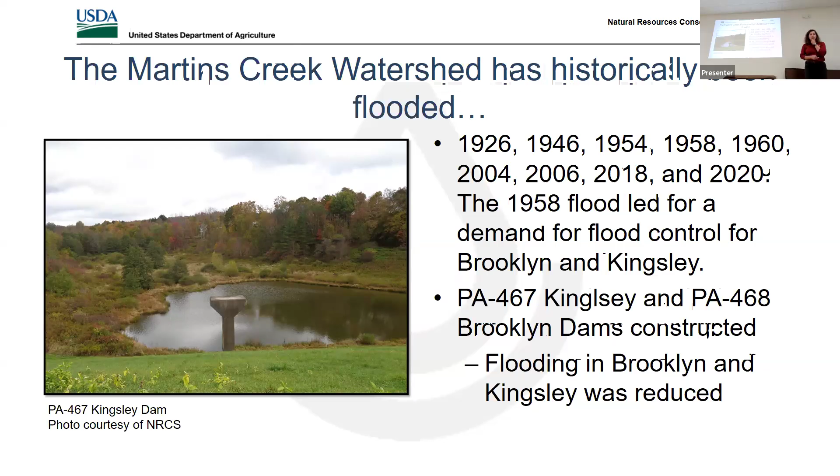You can see some of those major storm events. So the dams were constructed and are doing their jobs well for those communities, and the flooding in those communities was reduced. However, it didn't quite go far enough and nothing ever made it down river. Those dams are too high up in the watershed to significantly control flooding down here in the Nicholson area.

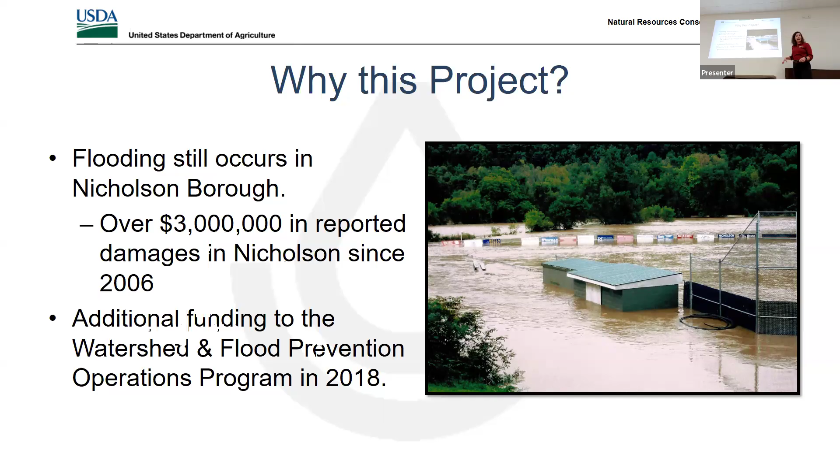So at that point, the Wyoming County Conservation District and the Nicholson Borough reached back out to NRCS and said, hey, you guys did good work up there, but what about us down here? Can you do anything and help us with our flooding now in this area?

So we embarked on the watershed planning process. Planning is the first phase of a three-part process to actually build something. Because these types of projects are expensive, multi-million-dollar projects using taxpayer dollars, they need to be very deliberately planned to make sure they're a good use of those funds. I know you can joke about federal government and taxpayer dollars, but we do our best to make sure we're using them efficiently. It's a three-part process, and the planning phase we're in now can take generally 2 to 3 years.

The design phase, which includes permitting, and then construction.

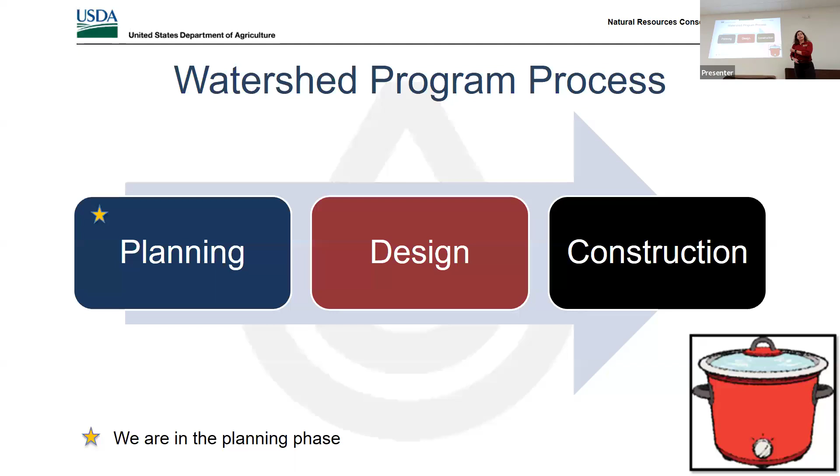If you were here last time, you'll remember my crock pot. This is an extended process, but I always joke—I don't joke, I'm very serious—that better things come out of a crock pot than they do a microwave.

So relating to that plan, we're quickly going to talk with you tonight about what we've done: problems and opportunities, determine the objectives, inventory the resources, analyze the data, develop alternatives, evaluate those alternatives, and then you are part of the step we're at here, making the decision before we move forward and ask for funding to implement the plan. Any questions on what I've covered so far?

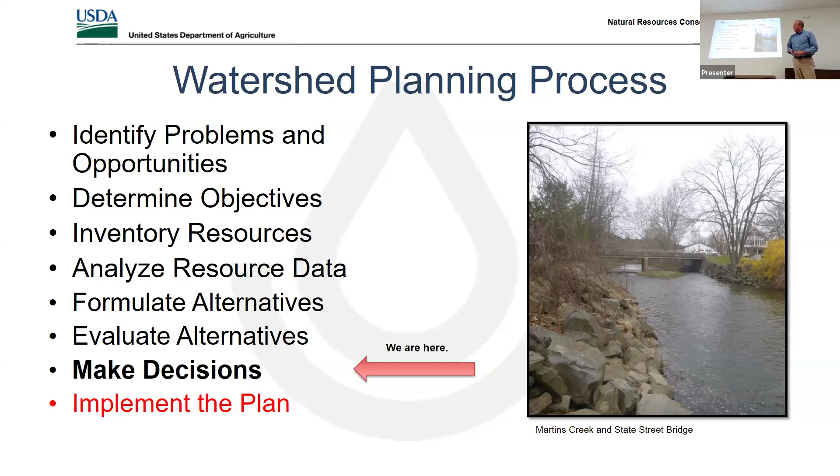We start off this entire process by identifying the problems and trying to come up with opportunities to resolve those problems. There are two main divisions: we have our economic impacts to structures and infrastructure within the town. We're looking for ways to minimize flooding and protect those resources, and make sure we're protecting all of your personal belongings, making life a little easier by not having to deal with these flooding conditions on a continued basis.

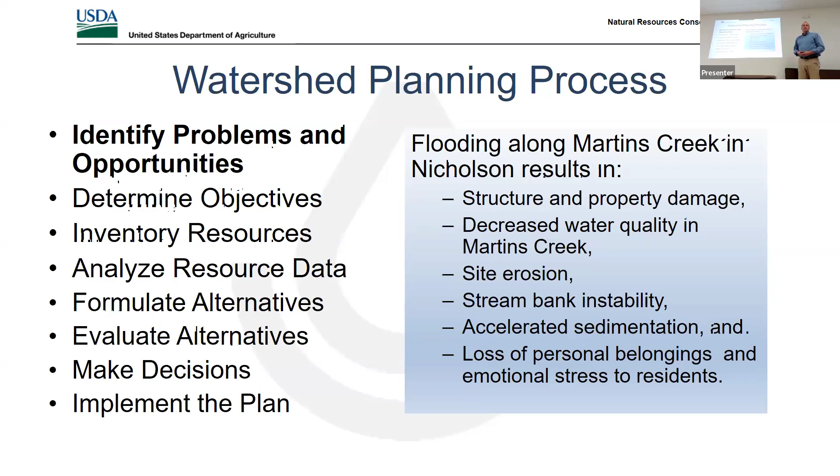So we have the economic side, and then the environmental or ecological side, dealing with impacts from flooding due to stream bank erosion, increased sedimentation within the stream, and decreased water quality in general. Those are the problems, and with every problem there are potential opportunities to make improvements. Of course, the most important thing here is human health and safety.

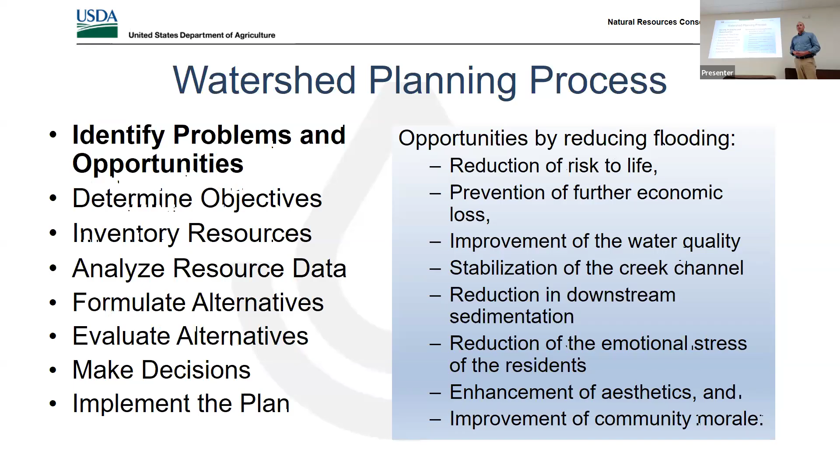So when we talk about flood mitigation, we want to make sure we're reducing the risk to life. We're protecting the resources you have in town, but also looking for opportunities to improve on the conditions that are already here—improving water quality, stabilizing eroding stream banks, and an overall improvement in quality of life.

Part of the process is coming up with a purpose and need for the project, and that's part of determining the objectives. We know there is rather frequent flooding within the town, so we're looking at establishing a threshold to limit flooding as frequent as a 2-inch rainfall event, which is more or less the annual storm event—about the maximum precipitation you'd realize in any one year.

Of course, we understand that we want to maintain access to the stream for fishing and recreational purposes. So we need strategies that meet both objectives: protecting properties, but still maintaining access to the stream.

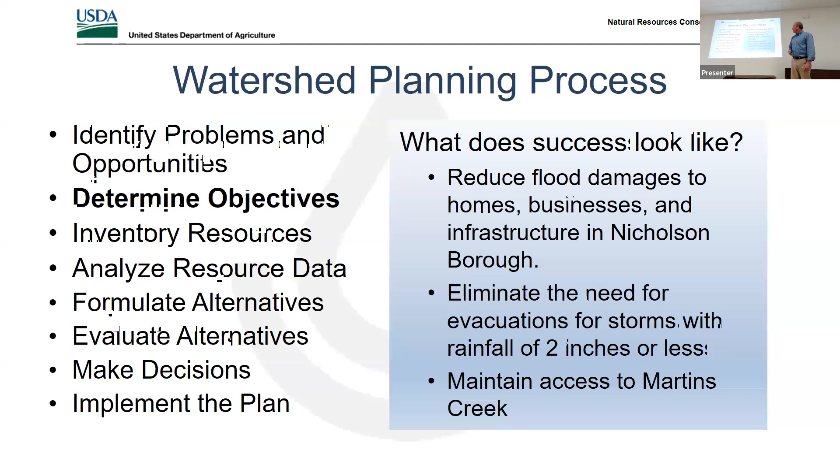The DDK team, along with NRCS, has been busy completing all sorts of work over the last couple of years. There's been a variety of field investigations and work performed at our offices, doing desktop reviews and reviewing available information. Probably the most important is the topographic survey.

Recently we came down and performed a wetland delineation, established ordinary high water, and looked at various databases for historical resources, both archaeological and historic structures. We're looking at potential impacts to climate change and rare, threatened, and endangered species—really taking a comprehensive look at all the resources around town.

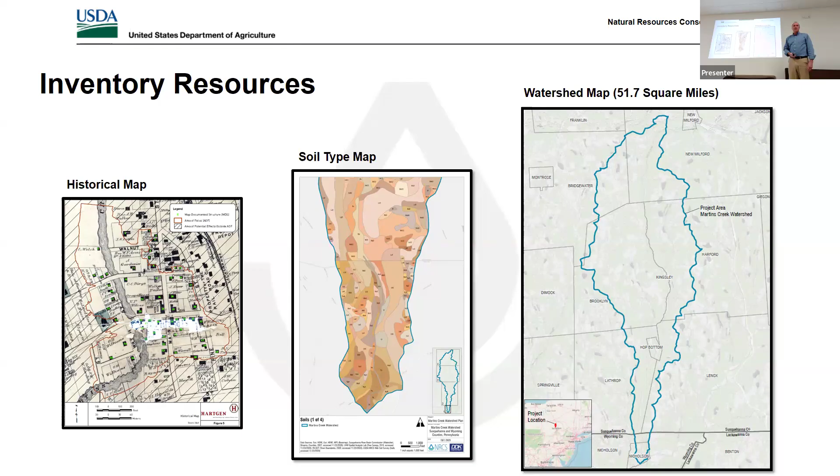This slide gives you a few examples of what we're looking at when performing a desktop review: historical maps on the left, reviewing existing soil mapping, determining hydrologic soil groups—basically the overall characteristics within the watershed.

The H&H analysis—hydrologic and hydraulic analysis—is the meat of the project, and Mike's going to go into a lot more detail on that. This is really where we come to have a greater understanding of what's happening in the watershed. That involves first determining the actual volume of water coming through the watershed, which is done by looking at the topography, the land cover, and the soil types. All of that determines how much water actually arrives.

Once we establish those values, they can be plugged into our computer model, and we can evaluate hydraulic conditions, which tells us more about the extent of the inundation and how fast the water is moving. That all informs us on what appropriate strategies can be taken to mitigate flooding.

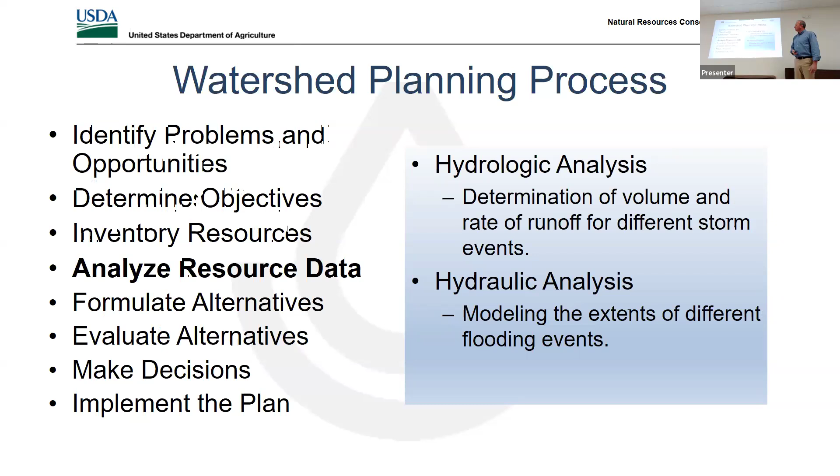So once we understand the issues, once we've studied the watershed, then we can start to formulate ideas. This goes back to the main purpose and need: what do we really want to accomplish here? Well, we want to reduce flood damages. That's really why we're here.

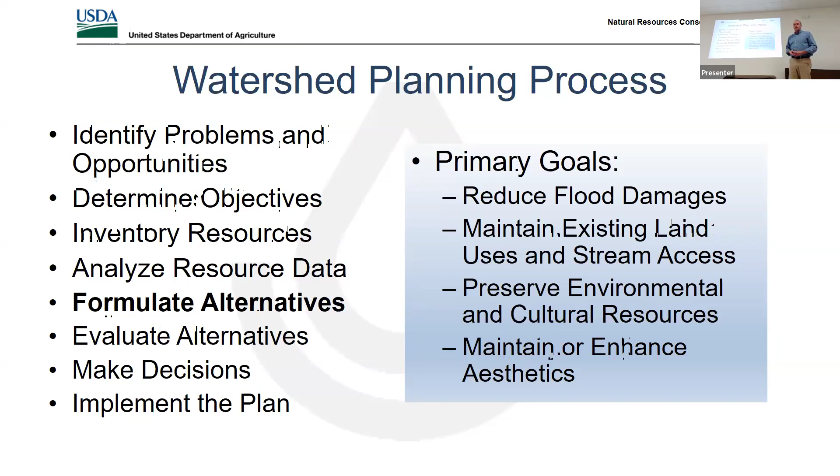Mike will be going into a few more of these flood protection strategies, but there are several. Flood volume and rate reduction is sort of what Heather was talking about at the beginning.

We have existing upstream flood control structures in place that are very effective at reducing the volume of water that arrives in the stream. That's just one strategy.

Avoidance, we're talking about potential relocations of structures or buyouts. With floodproofing options, we're considering either a wet floodproofing or dry floodproofing strategy where we can implement barriers on the existing structure, or improve the openings that exist on structures so floodwaters can easily come in and exit once the flood event is concluded.

We can talk about barriers as a potential strategy. The use of flood walls is one that's being considered here. And finally, drainage improvements, things like improving the stream channel, or a potential diversion structure where you're taking a portion of the flows and redirecting it down the stream.

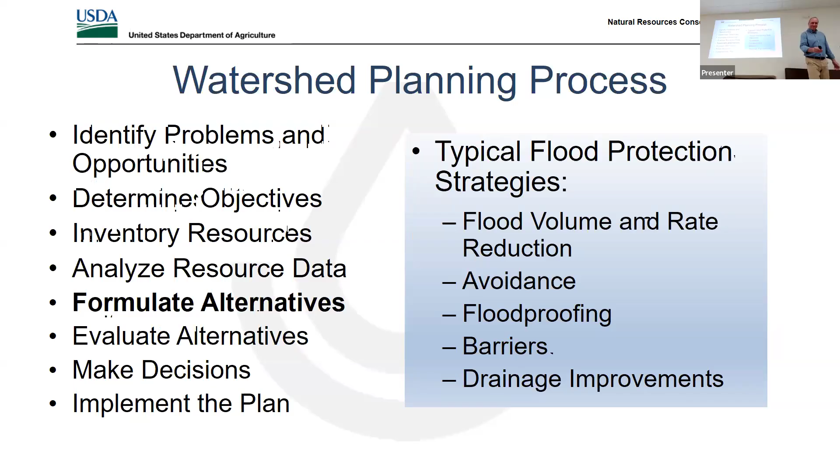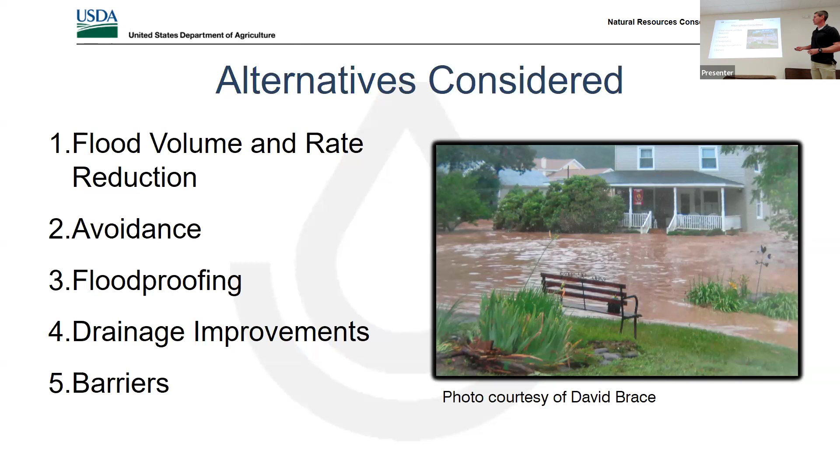Okay, so Andy kind of went over the general idea of these 5 strategies. I'm going to describe maybe some more specifics of how we looked at each of those strategies for this project. We want to talk more about what we think will work and less about what won't, but I'll give you a little rundown of at least what we went through in evaluating these alternatives.

So for the flood volume and rate reduction, as Andy said, we're trying to establish structures upstream to keep the floodwaters from making it to Nicholson in the first place. Some of the more specific things we looked at for this project: what if we can do upstream land use changes or infiltration areas?

And those are nice projects because they're typically green, so to speak. They involve establishing forested areas, landscaping elements and things to help capture the runoff.

For this project, through our evaluations, we found that they're not a great alternative, just given the watershed of Martins Creek and Nicholson is about 52 square miles. And while these types of projects are nice little projects, at the scale of this watershed they aren't real effective. Also, a lot of Martins Creek is pretty rural, as you know, so a lot of it is already forested. There's a lot of green space in the watershed as it is, so there's not a lot of opportunity to make a big change in that regard.

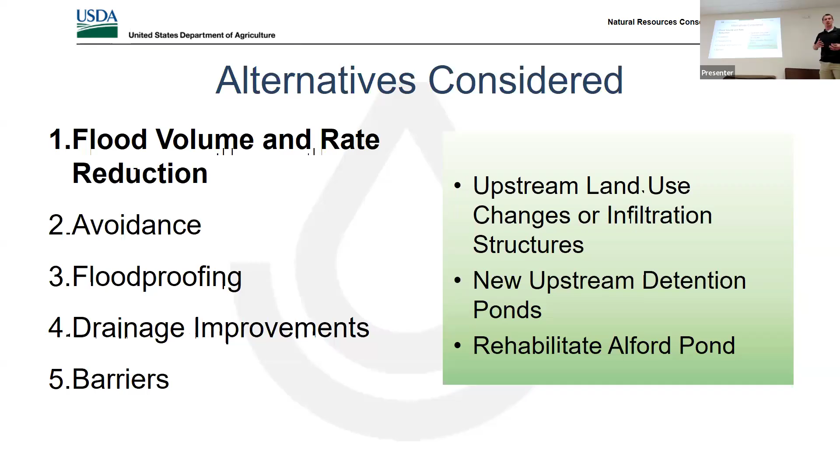The next two bullets look at upstream detention ponds. The other strategy is, can we establish a structure upstream that will capture rainfall and then release it at a controlled rate so it's not coming so fast and so hard at one time in Nicholson here? A specific one we'll mention is the Alford Pond — can we rehabilitate it and better utilize it for storm runoff, as well as improving the stability of that pond.

So on the next slide I can talk a bit more — hopefully you can see this okay. I don't think you need to see the details, but the blue boundary here is the limit of the Martins Creek watershed. We are down here at the bottom in Nicholson.

These teal circles here are existing ponds that we evaluated preliminarily to see: could we just modify an existing pond rather than starting from scratch? Can we just upgrade one that's already there?

So we had a few: Lake Chrisann, Beaver Meadow Pond, Pratt Road Pond, and Jones Lake Pond. We preliminarily screened those. One of the challenges with existing ponds is oftentimes they'll have a community around them, with existing residences and things.

The challenge with modifying an existing pond for it to store more rainfall, which is what we would want, is we would either have to permanently lower the pool, and in that case the residences around there no longer have access to the water—not a great alternative. The other option is raise a dam or construct another structure around it and allow the pool to come up during a storm, but in that event we would flood the residences around it. So there's a lot of challenges with modifying an existing pond.

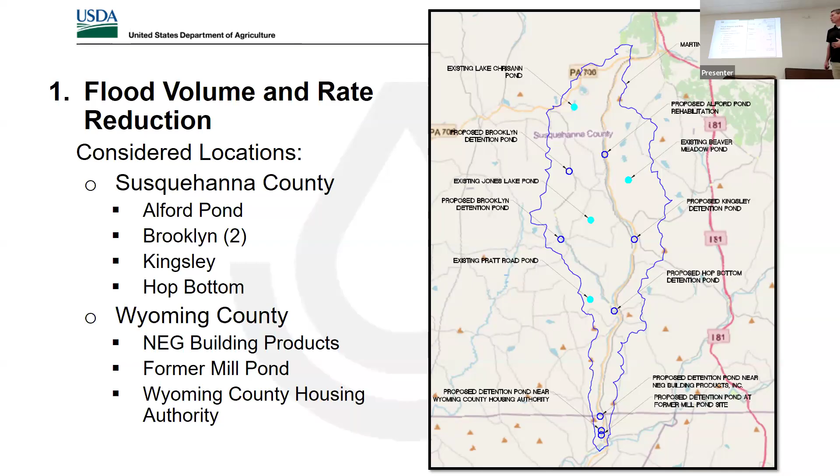With any of these, we dealt with certain site constraints: existing roads, existing residences, utility lines. We need to think about what would be directly impacted by the earthwork to establish a new pond, but also that when it rains, it's going to flood things upstream by temporarily holding that water. So we worked within those site constraints to preliminarily evaluate these ponds.

As Heather touched on earlier, we also have to consider where these are in the watershed. If we're too far upstream, we're not controlling enough watershed to really make a difference. It's a 52 square mile watershed, so we need to control a lot of it to make a difference all the way at the bottom here. And the storage volume is also critical—it's a large volume of water, so we need to store a lot to make a big difference.

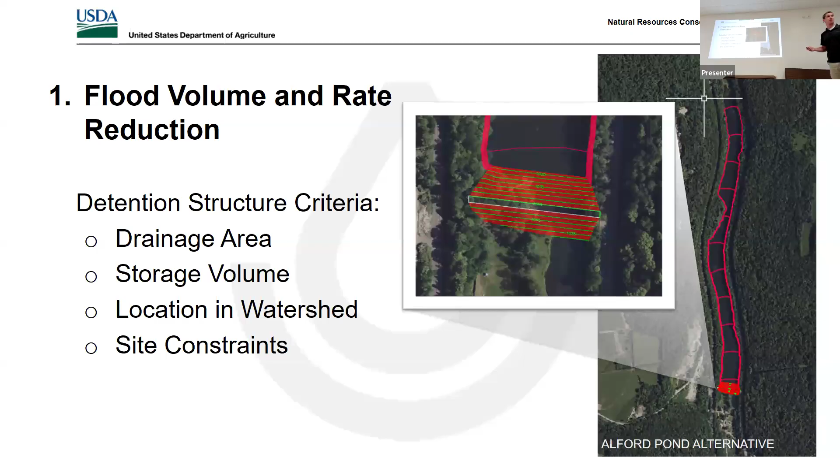The second and third categories are avoidance and floodproofing. From an engineering perspective, we evaluate those in the same manner. As Andy said, avoidance means we're looking at potential buyouts.

So if there's a structure that's really flood prone, from an economic perspective it might make sense to purchase that property at fair market value, make arrangements for that person to move to a similar residence or property, and then convert the former property to a green space. That's very effective in terms of preventing flood damages, but we also recognize how sensitive that can be to a community to want to move people out. So we do evaluate that in the process, and we'll touch more on it a little later.

We also looked at relocating structures and raising structures. For relocating structures, the limitation in a town like Nicholson is: if you want to move a structure, you have to have a place to move it to. Down in Nicholson, a lot of the flood prone areas don't have an obvious place to move them to without bumping into other structures. So relocation isn't a great alternative.

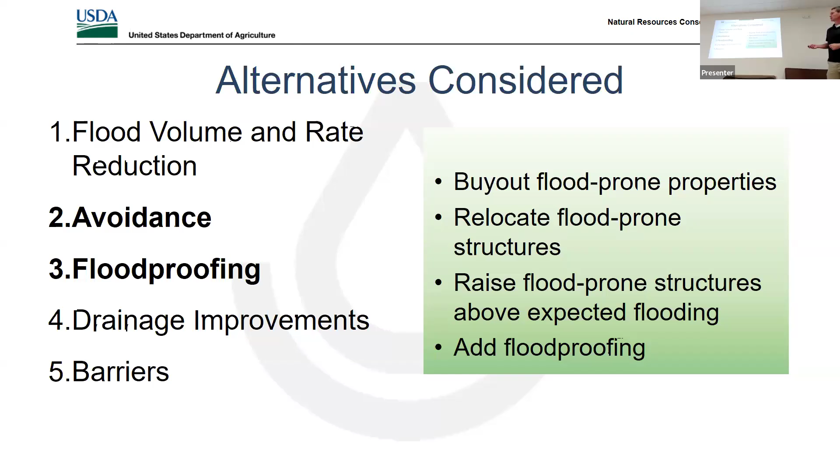This is just a look at how we evaluate the avoidance and the floodproofing. This map here, Martins Creek is shown in this dark blue line, and the inundation area, or where we expect it to flood, is shown in this teal shaded area. In general, the darker the color, the deeper the flooding. So you can see at the edges here, it kind of fades out to nearly nothing, but it's a darker color next to the creek, as you would expect.

We developed this inundation area based on our detailed modeling, and we have the structures, at least most of the structures, outlined in the red borders here that you can probably recognize. I think this is Nicholson Tire here for a point of reference.

But to look at the avoidance and floodproofing, we developed this detailed model and we can tell you the approximate flooding depth at each structure, and then think about what might make sense to modify it. But you could see the challenge if we wanted to do relocations. There are a lot of structures near the creek here and maybe not a lot of places to move them.

Like, what storm is that? This is the 100-year storm, sorry. So this is a pretty extreme storm event, the 100-year storm.

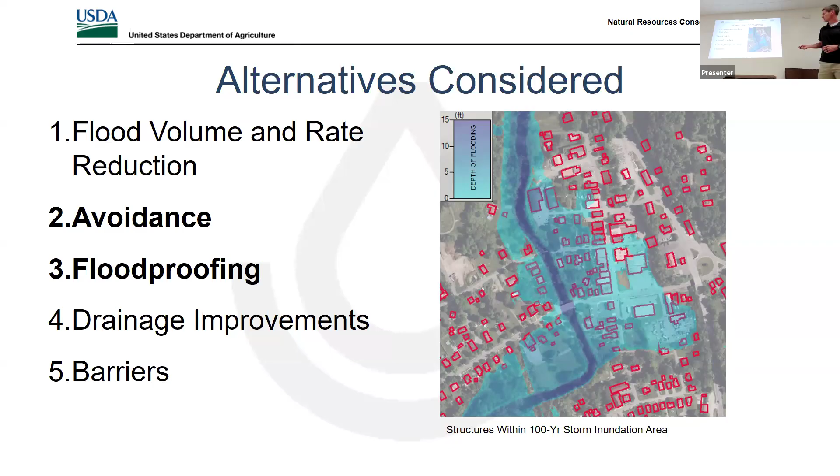And these are additional maps similar to what we were just looking at. The 10-year storm is on the left, the 25-year storm is on the right. So you can notice, as you would expect, the flooding limit for the 10-year storm is less than that of the 25-year, which is less than the 100-year.

But you can see even for the 10-year storm, we have a handful of structures in the expected flooding area. And I'm sure some of you may live at these structures and might recognize that. But that's kind of how we evaluated buyouts and relocations.

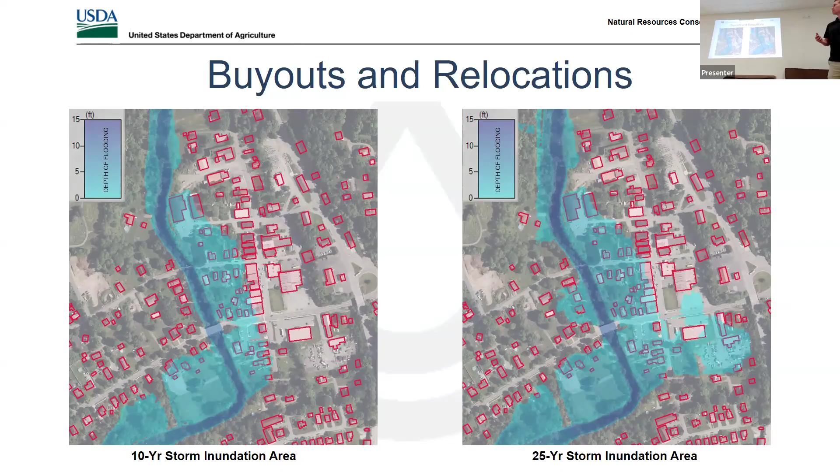Drainage improvements. From an engineering perspective, drainage improvements are kind of fun because you can use your imagination. As Andy said, we're trying to find ways to divert water around flood sensitive areas or try to improve the capacity of existing structures to get more flood water through and limit flooding of adjacent structures.

So for this project, we looked at establishing a diversion culvert or channel through the former trolley corridor. And I'll show a map in a second to talk a little more about these. There was some input during the first public meeting about the pier at the State Street Bridge potentially causing or contributing to flooding, so we looked at eliminating that. We also looked at widening Martins Creek through the Nicholson area here, deepening or dredging Martins Creek to improve the flow capacity, and then straightening Martins Creek.

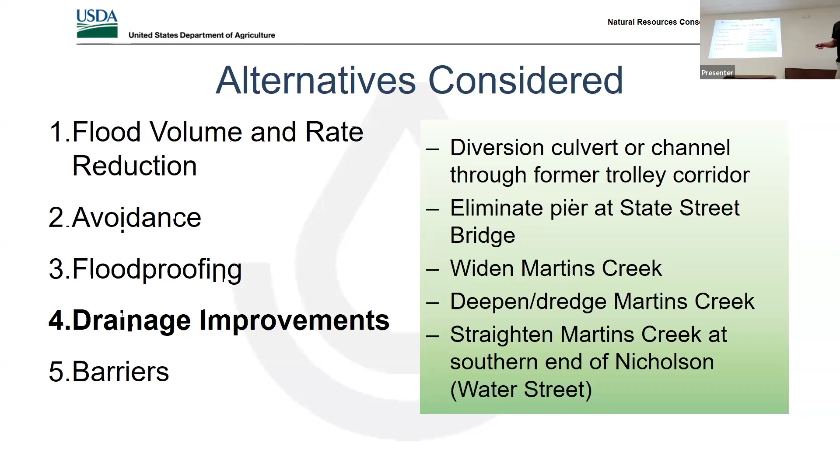Kind of at the southern end of town, we have this nearly 90-degree bend. So we said, what if we could straighten that out and maybe reduce the energy losses there?

With the diversion structure, we have it shown in these pink lines here. We thought that might be a decent alignment. We understand that's along the alignment of a former trolley corridor, so that was a nice corridor where we could avoid a lot of impacts. If this were to go to a final design, there may be some impacts to local residents, but it was relatively clear. We were looking at establishing a large culvert or channel that would collect a portion of the flow at Martins Creek up here and divert it around town and then discharge it downstream here.

And we had high hopes for that one. What we found through our analysis is that it would help to reduce some flooding in Nicholson, but you could imagine a project of that size starts to become cost prohibitive. That structure would need to be comparable to Martins Creek to make a difference for the types of storms we're evaluating. So in this case, the cost outweighed the benefit.

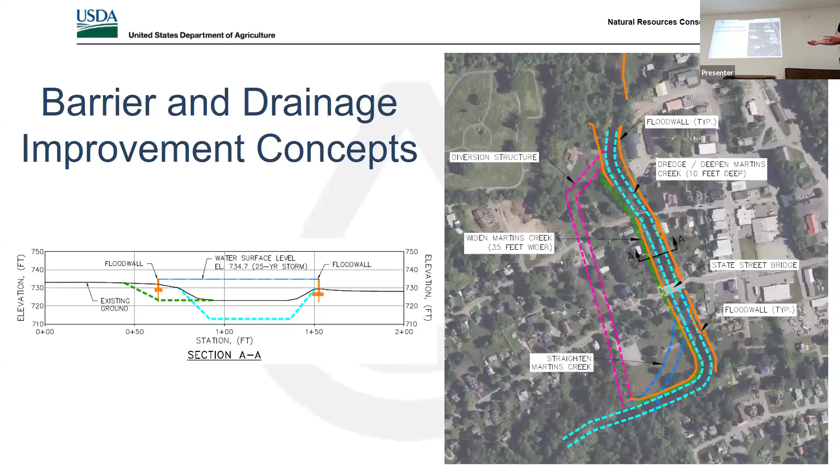Again, for the size of the watershed and the volume of water that we're talking about, it doesn't help significantly. So that's kind of a quick summary of the drainage improvements that we considered.

And then we get to barriers. Barriers are typically flood walls or levees. In this case, they would be established along the banks of Martins Creek through Nicholson. Mostly it would be flood walls, just because those take up a smaller footprint. We'll show some typical levees later in the presentation. It would be mostly flood walls, and they're typically concrete or masonry structures.

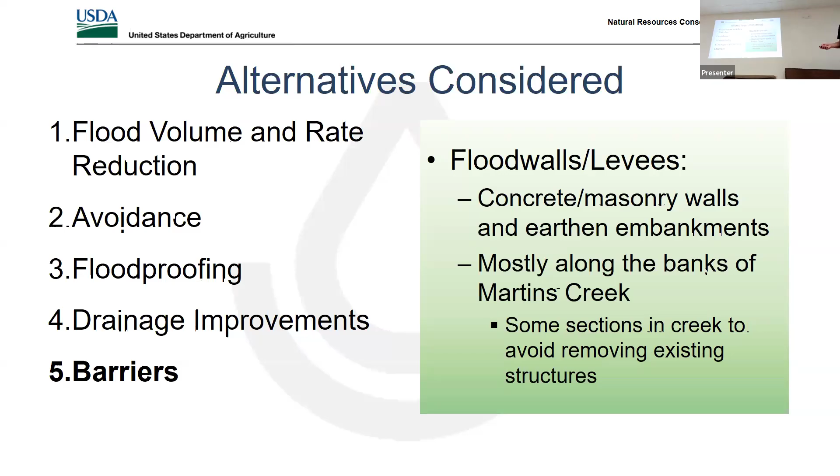And we found those to be pretty effective. We're going to talk more about those. As I said, I wanted to give you a brief rundown of what we looked at, what didn't work. We want to talk more about what we think will work. So flood walls will be more in the discussion as we get further along.

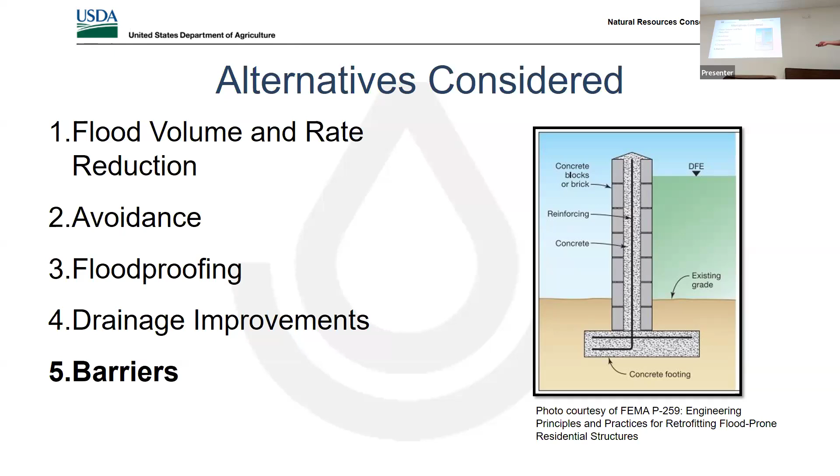Now, the drawback for this 100-year option is, again, it's a pretty extreme storm event. The height of the flood walls would vary from 2 feet up to 12 feet, which we realize is pretty imposing, so probably not preferred. The other disadvantage is at the State Street Bridge, for this case, to confine the flooding, the bridge would likely be overtopped.

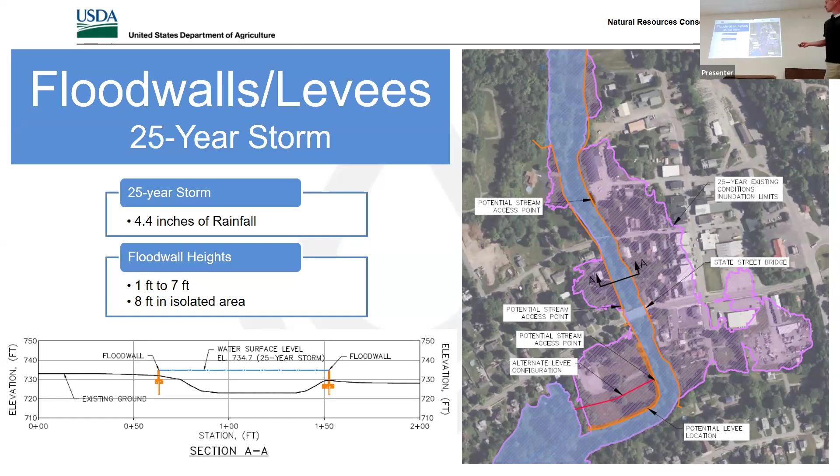I should mention with all of these, one of the goals for the project is to preserve stream access. So if a flood wall project were to carry forward, we would try to incorporate access points at a few critical spots, so you could still get up and over the wall to access the creek for fishing or for recreational uses.

Another thing we thought about is where we could use a levee, if that would be more preferred. Levees, as I mentioned, take a larger footprint. A flood wall might be 12 to 15 inches wide with some drainage features next to it. A levee would vary based on height, but think 15, 20, 30 feet wide by the time you build it out and come up to the crest.

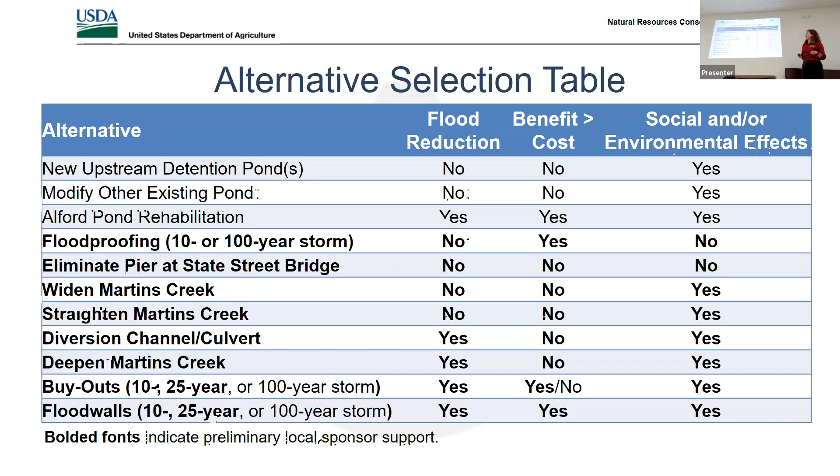So from there, what we did was we pulled out the ones that seemed to have yeses most of the way across, and we got into it a little bit deeper, a little bit better, and then we dug into things.

Alford Pond Rehab, buyouts, and the flood walls definitely had strong, or at least notable, flood reduction benefits. The cost of them was cheaper than the benefit, the benefits outweighed the costs.

But as we dug into them a little bit more, things fell out that they may not have had that sponsor support. For the Alford Pond, remember when I said about the buyouts, the sponsor is required to provide the land rights to be able to do the work? Not the buyouts for like the flood wall and things like that, just that the sponsor needs to provide those land rights, and then NRCS can come in and build whatever we're going to build.

It's not in Nicholson Borough, and it's not in Wyoming County, so even though there's local support here, we didn't have the support in Susquehanna County to move forward with work at Alford Pond. The buyouts, there was just no good place in Nicholson to be able to keep the tax basis and keep that community support if we bought out the folks in the floodplains. So for those reasons, the buyouts didn't have local support once we got further into the numbers and further into looking at things.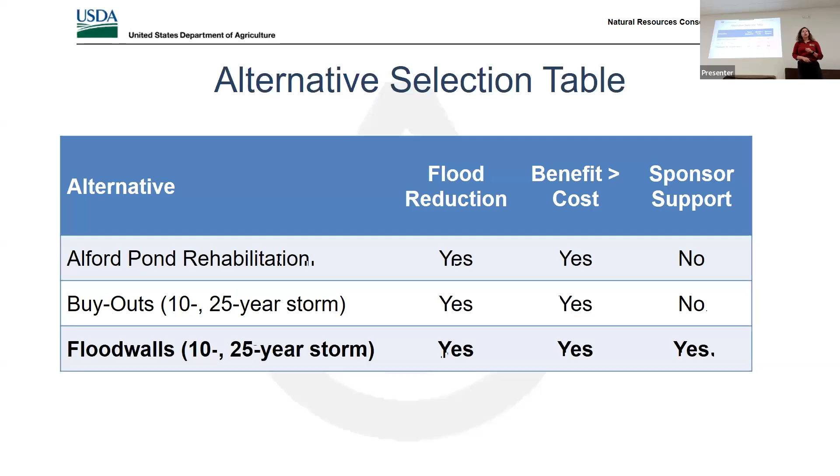So that's where we ended up taking a stronger, heavier look at those flood walls. What we did, and you saw some of this already, was look at each of the different storm events. That's 3.7 inches, my bad, I didn't get the other little one there.

Remember at our opening meeting, one of the things I clearly heard was that the definition of success for this project is that you didn't have to worry about evacuating people for a 10-year storm event. So that was the bar we were working with. For a 10-year storm we got 3.7 inches, a 25-year storm 4.4 inches in a 24-hour period, and a 100-year storm 5.8 inches. This is the average, just a summary of what we were looking at.

All three of them have permanent stream impacts. All of them, while mostly being on top of bank, are jutting out into the creek a little bit to protect some of the structures so we didn't have to do buyouts. There's a couple of structures, homes and businesses that we wanted to avoid and didn't want to have to worry about buying out, so we will be working in the creek for some of those.

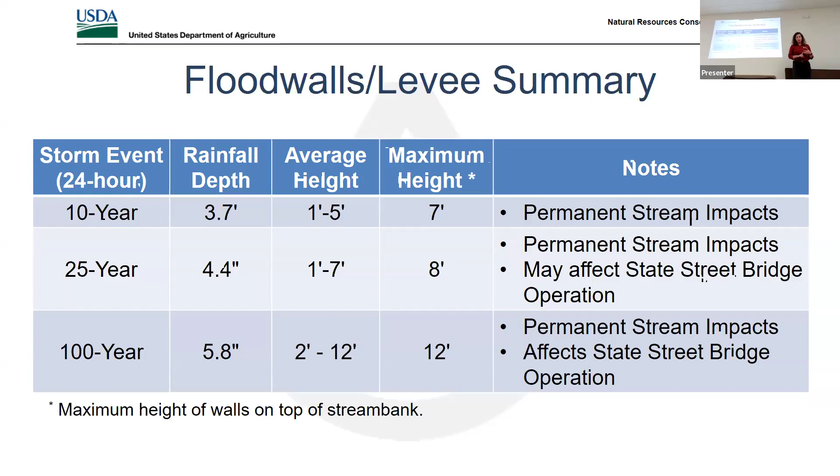A phase 1 report, which is the first part of the report, was done for the areas that we're planning on impacting or that could possibly be impacted. The second part of it, we are still walking through. We are walking through consultation with one of the tribes, I believe, and we are still trying to work with them, so let me go back.

So down here in Water Street, where we're looking at doing potentially a flood wall or a levee, FEMA did the buyout several years ago, right? So FEMA at that point was supposed to have done the cultural resources and section 106 compliance with this area. Did you know that FEMA's now in North Carolina and Tennessee for Helene? And while I've been working back and forth with FEMA and PEMA to get this information, all of a sudden, right before the meeting, they had to go take care of that.

So we are going through the section 106 process. It is certainly not complete. We are, like I said, in the process. We've shared information with SHPO, but we have not completely cleared all the cultural resources parts of this project yet, but we are walking through the process.

Oh, does that answer the question, or does that just stir up more questions? That answered it on our end.

Okay, very good. So going forward for the rest of the meeting, we have to keep in mind the order moving forward, we're gonna have to give up a little bit as a borough to protect the borough. It's not gonna be a situation where we'll be able to have our cake and eat it too, per se. We might have to move the footbridge, get rid of the footbridge, flood walls, and you might come down the road and say, oh, I don't like looking at that. But at the same time, Main Street's not gonna flood.

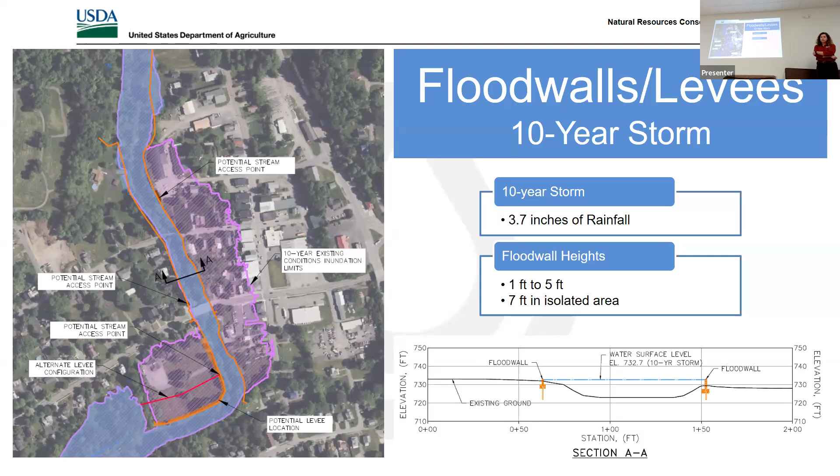And we will talk about a bunch of what you just brought up. Part of this meeting is to fully disclose the good, the bad, and the ugly of what we're looking at and what we're proposing, and then to have you inform your community leaders as to what you like, what you don't like, and if you don't like something, if you have a way to improve it, we're happy to take that too, for them to make the decisions as to what they'd like to move forward with.

So we had a question about what these levees and flood walls could look like. I'm gonna turn it back over to Mike to tell you more. Thank you, Heather.

Okay, so we had a question earlier about what do we do with the water on the upslope side of the wall. These next couple of details will hopefully help clarify that. So the wall again would look like something like this, where you have a reinforced concrete element, and then have some type of architectural facing on each side.

So just for some rough visuals, something like this might be the ballpark of what we're looking at. In this detail, the creek side would be over here. So on the upslope side, we would have some type of riprap-lined swale to help collect water that accumulates on the upslope side.

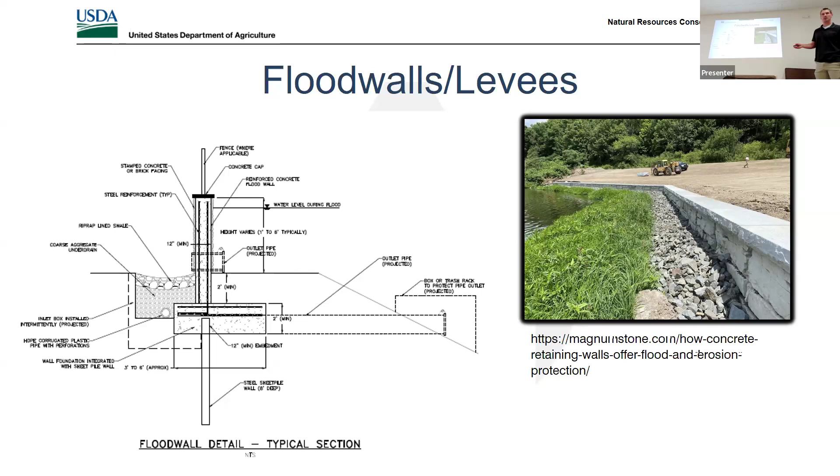Now, during day-to-day storm events where the creek isn't flooded, but it's raining, the rainwater would be allowed to exit through some type of outlet pipe or catch basin. But during a flooding situation, you might install something like a flap gate on the end of these pipes to close them off from the creek water. And then you would need to activate a sump pump with a pipe that went up and over the wall to keep the upslope side dewatered.

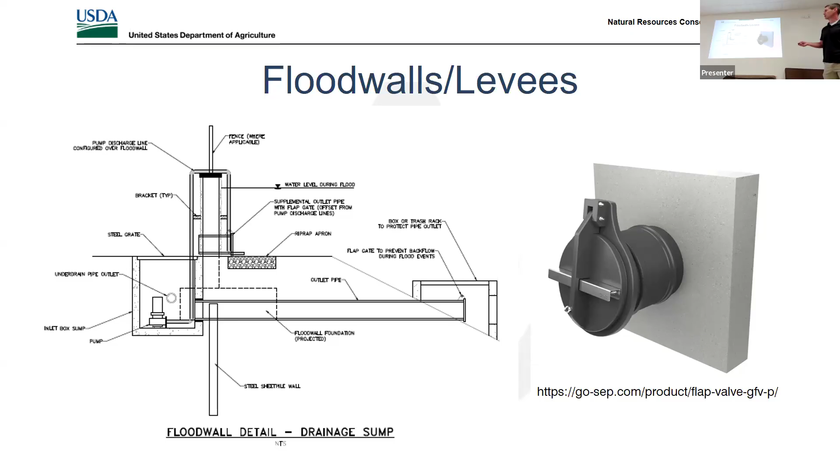Yeah, well, probably electric, so we were going to touch on that later. You'd have to run electric to the pumps. The goal would be to limit those to the minimum number needed, but that's kind of a critical feature with a flood wall.

So we mentioned access points. We had something in mind that would be like concrete stairs at some critical locations. So on the left detail here, we show the flood wall, and then you would basically have a set of stairs on each side with some type of landing on top so you could get up and over. And then we have just some rough visuals there.

Yes, include that visual. Or a ramp.

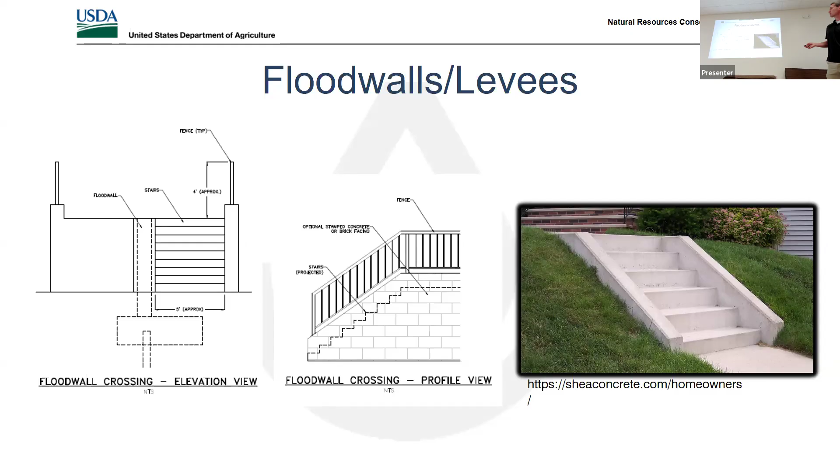And then again, just some visuals if a levee were to be implemented at the southern end of town. Don't take these dimensions to heart, but this is just kind of a typical configuration of a levee. It would be an earthen embankment, typically vegetated. For some instances, you might use riprap to stabilize the bank and the flow area. But it might look something like this.

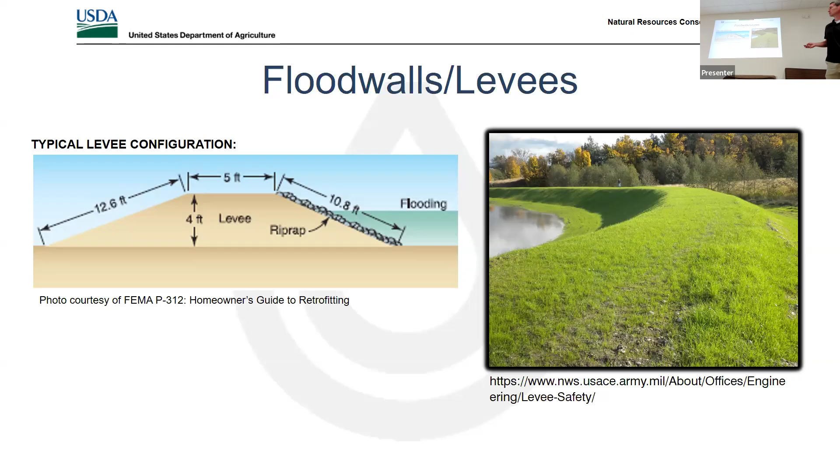So going through this flood wall system, we did some rough construction cost estimating for the 10-year storm option and the 25-year storm option, using typical construction cost data.

And kind of the way we evaluate the economics is we look at the total construction costs for the project. We determine approximate annual project benefits, and those are determined through a detailed hydraulic model that assigns damage values to different structures based on different types of flooding. So we can determine for a given storm how much damages would occur approximately.

And we tried to calibrate that model to the damage assessments that we got from all of you folks during the last public meeting. And so we determine an annual project benefit.

We convert the total construction cost to an annual project cost based on the total design life. So think of like a house mortgage. That's kind of the annual cost of the project.

So looking at the economics, we compare what is the benefit versus the cost. And obviously we would like the benefit to be greater than the cost. In this case, they're roughly approximate, which maybe Heather will talk on more, but from the NRCS perspective and evaluating a project, if we're getting pretty close to one, it can be a viable project because there are other things to consider besides just economics.

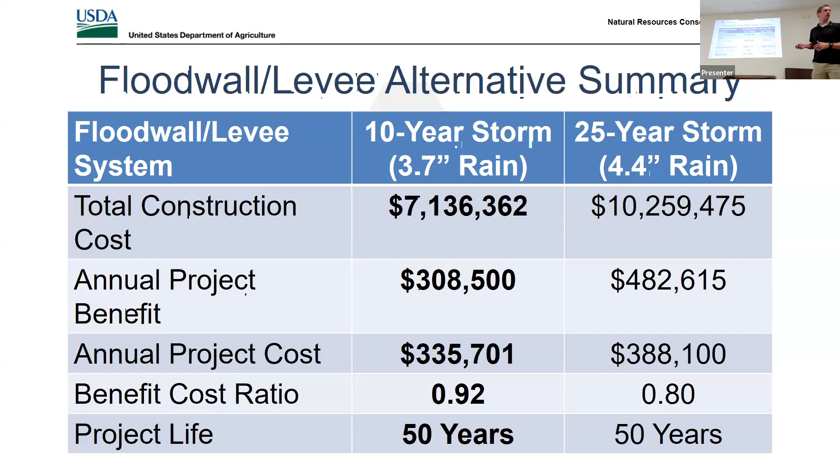Just to give you a feel for the approximate timeline, Heather had talked about, we're in the planning phase now. Beyond that, there would be a design phase and then a construction phase. So for the planning phase, we still have about 9 months remaining.

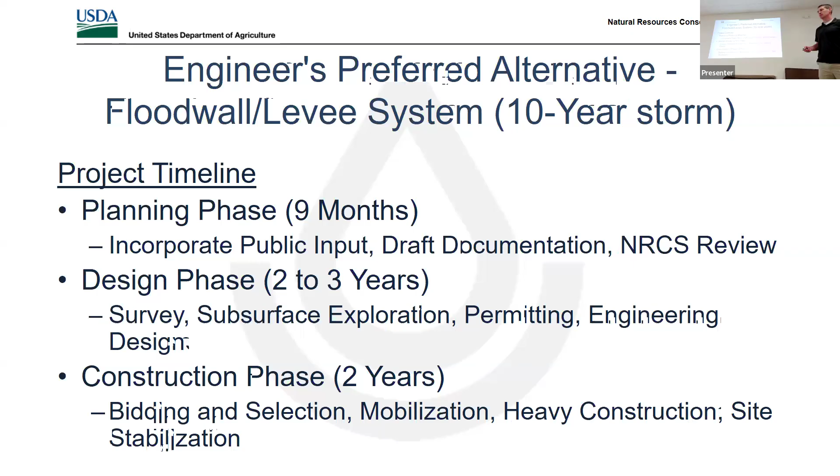And then the construction phase, we estimate roughly 2 years. That would start with a bidding phase, where we would have design documents available for contractors to review. They would bid on it. There would be a selection process. Once a contractor is selected, they would mobilize to the site, work through the heavy construction, and then eventually get site stabilization.

Any questions on that stuff before I hand it over to Andy?

Great. Andy's going to take you through what some of the construction might look like. Well, like Mike mentioned, we're probably on a multi-year timeline to get to the construction point, but I just want to give you some of the highlights of what you might expect if and when we get to that point.

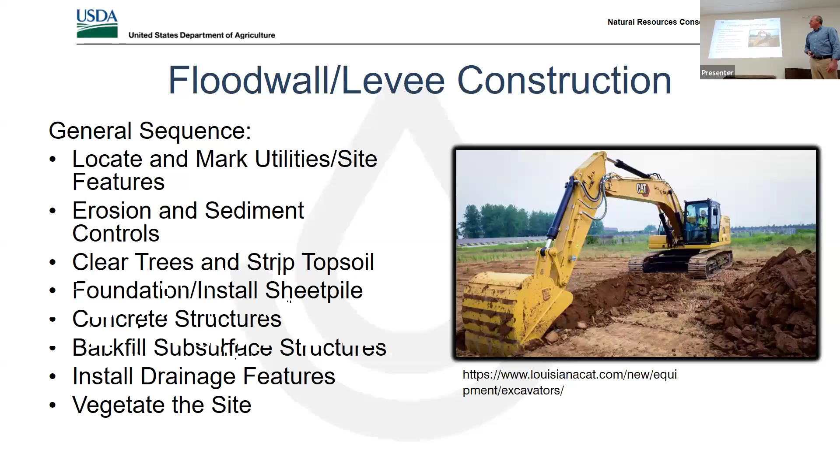It's kind of a multi-step process, very similar to other construction projects that happen around town on a daily basis. So really, we begin with the pre-construction and site prep type of activities. It includes marking all the utilities, establishing right-of-ways, all of that.

Before any construction really begins in earnest, we want to make sure that all the erosion control measures are in place. See photos here of installation of the coir log and coffer dam so that we can work in the dry. There are plenty of other erosion control measures as well, like silt fence, stabilized construction entrances, all different sorts of strategies that'll help keep sediment from Martin's Creek.

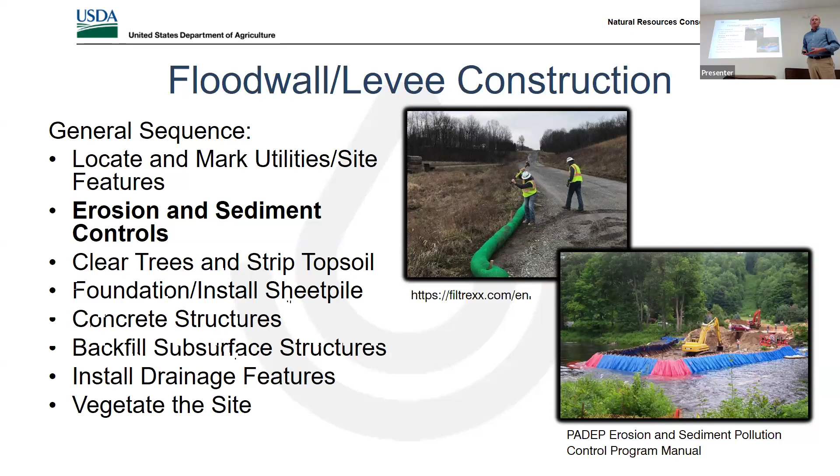Actual installation of the wall will begin with either that concrete footing that Mike showed on the previous detail, or installing our deep steel sheet pile wall, which would be used as a cutoff for groundwater flow migration and just overall slope stabilization. Not sure if you've seen that before, but a sheet pile wall is usually installed using a hammer, pounding the steel right into the ground, or a vibratory head, just shaking it right directly into the soil.

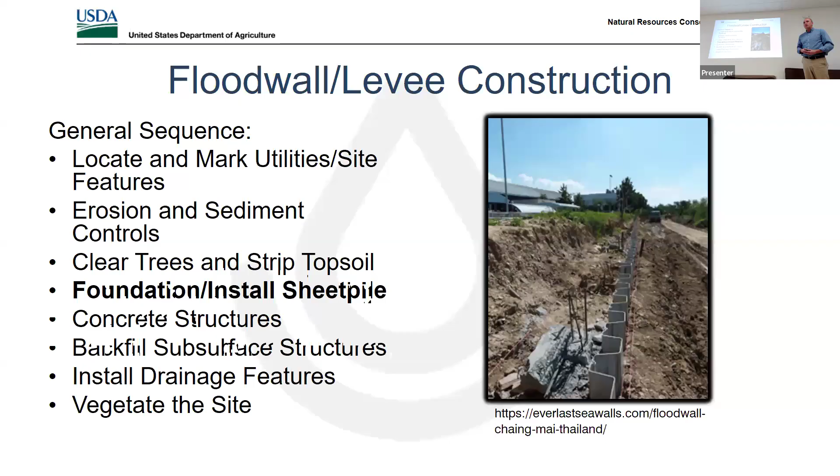Here you see a photo of the concrete foundation. Again, that's just used for stability of the wall. The actual vertical component is connected to the foundation to prevent overturning from the forces of the floodwaters against it.

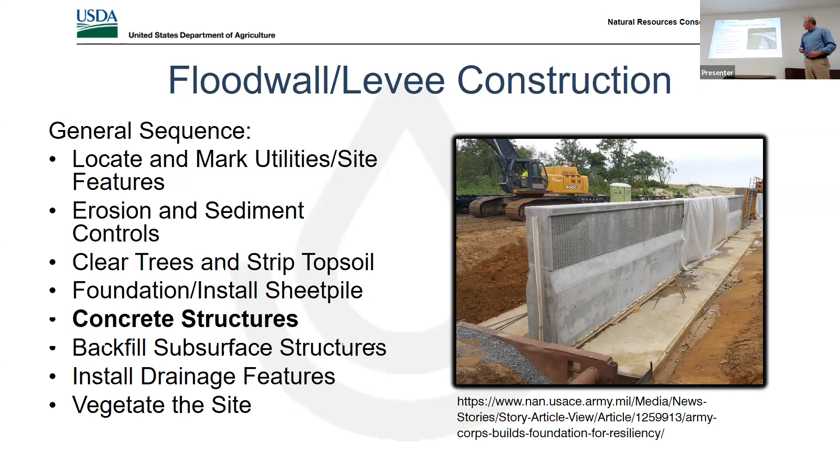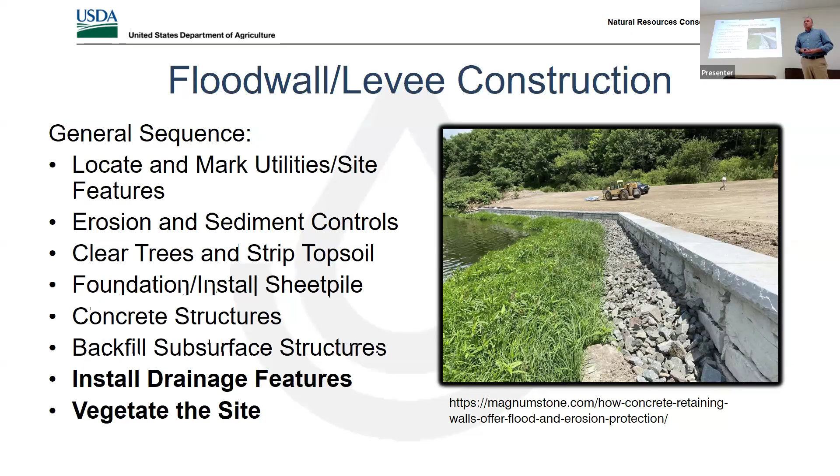This was the photo that's already been shared as far as the finished product. We have the facade that's fixed up with decorative stone, landscaping. We do expect that we will have some other plantings that are positioned near the wall as well, as far as screening is concerned. So we do try to make these as attractive as we can.

Okay, that was real quick, but I'm going to pass it back over to Heather. That's going to talk about the preferred alternative.

One thing I neglected to mention, before I get into all this, I did want to talk a little bit about, and we talked about this back at the first public meeting - and so if you weren't there, you wouldn't know it - a little bit about the stages with the planning, the design, and the construction of it.

I do want to point out that for what we are doing, NRCS is providing 100% of the funds for the planning stage. We will be providing 100% of the funding for the design phase minus permits. And we can also provide 100% of the funds for the construction phase minus the land rights. So the land rights are always a sponsor's responsibility, but we are providing 100% of the funds for construction.

So when you saw those totals earlier, that's what NRCS would be providing if this project would move forward. Of course, adjusted for inflation down the road, because it's not going to stay at those costs. But so NRCS is recommending that we move forward with the 10-year storm and controlling the 10-year storm.

I'm going to give you some general comments, and I'm going to talk about some good things about it and some bad things about it, and just lay all our cards on the table and say, what do you think? So we are looking at controlling storms 3.7 inches in a 24-hour period and less.

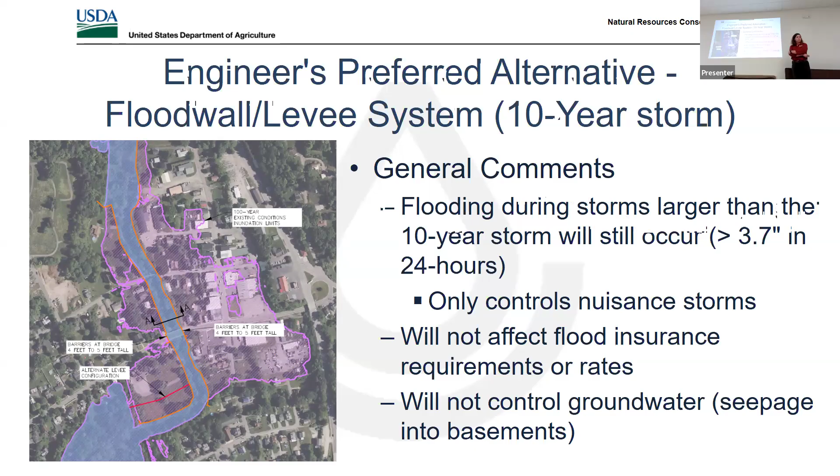So the good things about this alternative is that we are controlling those nuisance storms. We're reducing those flood damages by $308,000 per year. And we're reducing that potential for evacuations during the 2 inch up to the 3.7 inch rainfall event.

So we are hitting those targets. The other things to point out is that we are not planning to impact any buildings. We're not planning on impacting State Street Bridge. We are able to work around those for this. And we are still keeping Martins Creek accessible, mostly viewable. We're providing those access points, and it may work well for walking trail plans.

The green trails and pathways and things could be done along levees that would still be able to let you get into Martins Creek. We're talking about having fishing access or access up in this area, and then be up here at somewhere in that area to allow access up there.

So those are the good things. And relative's a key word, because I said we are in the creek in some spots, but relatively little environmental impacts.

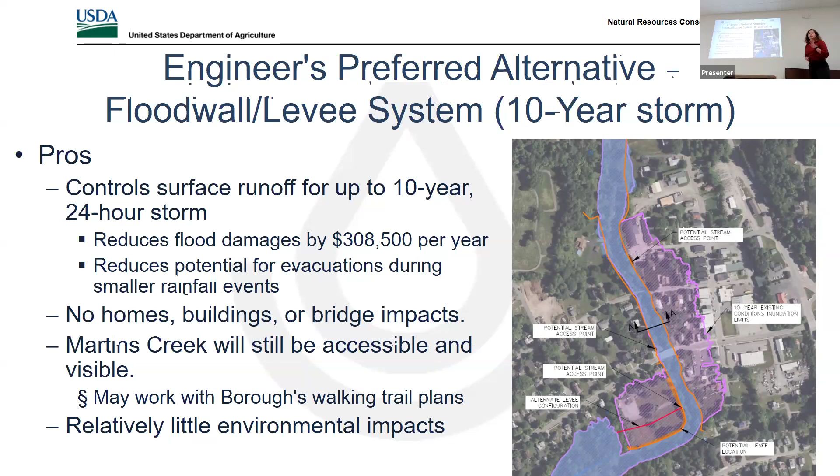That's the good. The bad. Okay. The pedestrian bridge to make this work is going to need to be removed. It can be replaced. That wasn't factored in, but that doesn't mean it can't happen. Just as a heads up, letting everyone know.

There are some large trees along the creek that will need to be removed to be able to get a flood wall in, in Martins Creek, to get some of those flood walls. Most of the work will be able, for the flood walls that are done on top of the bank, we'll be able to work on top of the bank.

You got to do the work in the creek. And then the other thing too is there will be land use restrictions and easements will be needed from the local property owners. If you live along the creek where the flood wall is planned, the borough is going to be coming to you and saying, hey, we want to put a flood wall right through here. Will you let us do it?

And that also means that, remember, we're putting a concrete wall in there, right? There's going to probably be potential for, like, you probably don't want to plant a tree that's going to get 40 feet tall right next to a flood wall. You might be okay, but whoever buys your house after you may not.

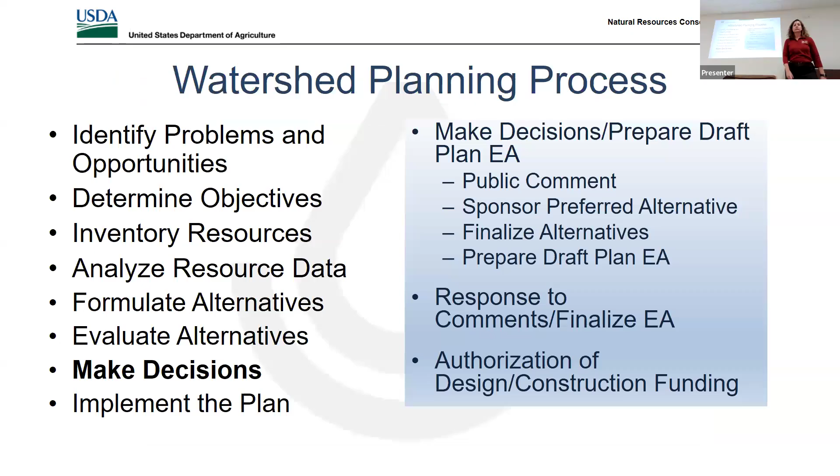Get to a point where we are closing 92, who's doing it? The fire department would be the most reliable one. I think there's about 4 or 5 of us in here that figure a lot of this is going to fall on this, so just want to make sure.

So let me address that, and I see there are 2 other comments. The maintenance is probably one of the big things that I neglected to have on the pumps, because it is mechanical, there are mechanical parts to it. And you're right, if you don't have the proper maintenance, you get a bathtub effect of the water coming down and getting caught behind the wall.

One thing we didn't talk about that could potentially be a part of this is some kind of flood warning system to help trigger either the fire department or local maintenance. Okay, but beyond the routine maintenance - testing the pumps periodically - what about when there's a storm event coming, or we've already received this much water in the watershed, let's start getting ready. What does that look like for each of those different flood depths? So that's something in the back of my head that we haven't fully fleshed out, but I could see it being an integral part of the project.

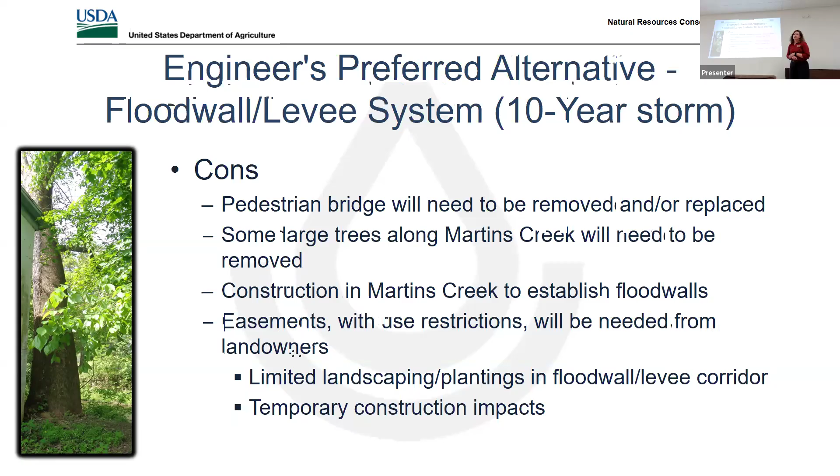Do you need vehicular access or would just a pump be effective enough? If we could get a dry hydrant - a dry hydrant is a piece of pipe alongside the road that goes through or over the wall at a certain location. We just have to be careful on the height of the wall, because you can only have so much lift to pump it over. So if there's lower sections in the wall system, we can incorporate something to get water access in the event of a big fire.

So the challenge is those lower wall sections are on a higher bank. We might have to try and figure out something underneath, since that's our main source of water for anything within our area. We do have a standard for dry hydrants - we've done several designs for those, at least ponds, and I think a couple of creek accesses too.